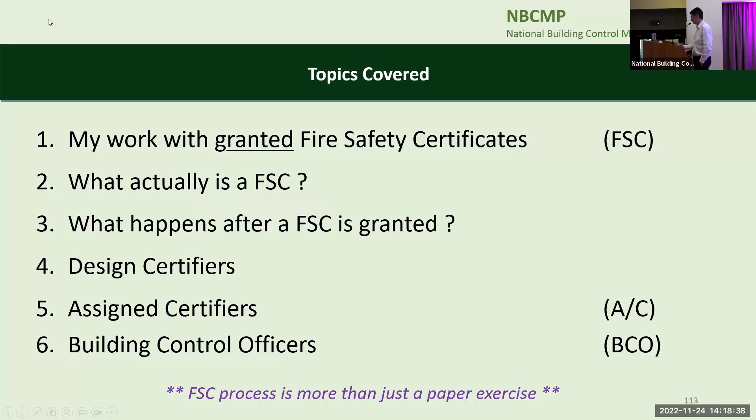9 of them what I would call desktop inspections. I've written out to the consultants based on what came in with maybe the commencement notice or the 7-day notice, and I have another 10 of them where I have gone out and done site inspections.

So one of the main kind of buildings that I wind up inspecting - I've inspected every type, but in the main, apartment blocks, schools, and nursing homes.

The apartment blocks - one of the reasons I went to there is that there's a significant consequence of non-compliance. Not only is there the life safety thing, but say like Priory Hall, where mistakes are made, it winds up costing a fortune to fix, if you can fix them at all.

Schools, I've done quite a lot of them. I know it's been said to me, why are you inspecting schools? Because it's assigned certifiers looking after them. And I'll give you 3 letters: WBS, Western Building Systems. That's part of why I go there. There's a lot of people going into the school, a lot of young kids, a lot of communities using the school afterwards. The government is paying for the school to be built, so we may as well check it.

And the last one I go to is nursing homes. You're dealing with a lot of vulnerable people. And also an important thing is Cork County Council took a decision years ago that we were going to do inspections of all the new nursing homes before they opened, just to make sure they complied. So my boss, Earl Ryan, a couple of years ago said, Martin, go out and inspect them from the start, so that when the dedicated fire officer goes out at completion stage or at opening stage, hopefully then they'll find no problems. That's not the time to find out that they didn't put the fire main in.

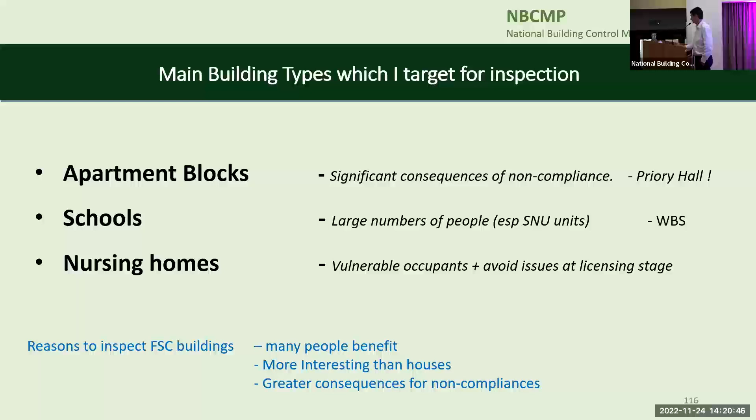Just some examples of the major issues I found this year alone. I had a school extension where they put on, I'm guessing, a 150 meter squared semi-basement that was never mentioned in the fire cert. That one could go to enforcement.

I had an apartment block. There were 2 smoke control shafts, a meter squared each, that were supposed to have gone in. When the fire cert came in, they weren't on it. The fire officer, for various reasons, insisted that they do go on the fire cert, and predictably enough, when they started building, they were missing. So that site has been sitting there for 9 months, nothing happening, delayed until the developers can figure out what they're going to do, because they now don't have room to put in the smoke control shafts.

I have a nursing home. They put in about 100 and something meters squared of timber linings on the ceiling, and a week later they had to take it all back down again, which costs a lot of money. It was clearly written in the fire cert, no timber linings, and they put timber linings in anyway.

I had a 2-story creche. They've put in large inner rooms up on the first floor that weren't on the fire cert. I've caught that one early, hopefully that's not too bad.

I had a storage building. They were required to put insulated cladding at one end of the building, and they put in standard cladding. About 3 weeks after they put it all up, they had to take it all back down again, and I think there was a couple of 100 meters squared of that. They thought they could change it because they weren't in a boundary condition, but they had forgotten that the reason the fire officer put the insulated cladding in is because there was a lot of high-level machines and access hatches up on the top level, and there was an external escape stairs coming down. So the insulated cladding was to cover that. The designer thought he was okay to change it, deviated from the fire cert, and had to undo the whole lot.

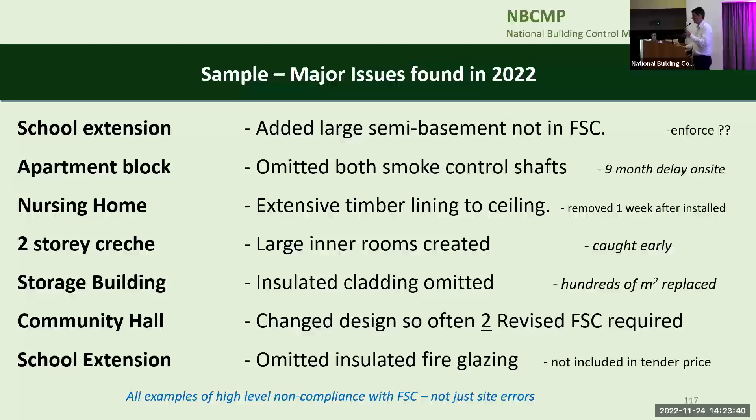So again, these are all high-level examples of non-compliance with the fire cert. They're not just silly site errors or bad workmanship.

If you came to apartment blocks, I kind of broken down the main errors that I found. On one side there, you have the workmanship issues. No matter how good your fire cert is, these are things that can go wrong. Fire stopping isn't great, or somebody's punched a hole through something for a pipe, plasterboard fixings aren't right because there isn't enough screws in it, fire doors have holes around them. I don't want to talk about too many technical details, I want to talk about the high level concept of fire cert. So they're all workmanship issues, and they can go wrong no matter whether you get a fire cert or not.

But what you also wind up getting is layout problems, where the designer has either deviated from the fire cert, or hasn't thought about it, or forgot about it, or thought it was okay to change something, and it caused a problem. So layout things, they put in a new layout, it now doesn't comply. Maybe they have open plan, which wasn't accounted for before, and maybe now they need sprinklers, or they've rejigged the kitchen to make it nicer and to put the hob in a better place, but they've now put the hob too close to the means of escape.

The fire alarms, again, a very common one in apartment blocks. They might put the right detectors in, but then they didn't interlink to the shop downstairs, which they were required to do.

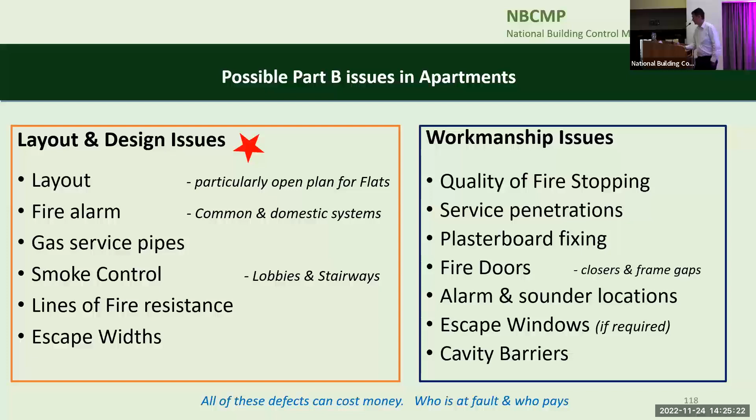Gas service pipes running through main escape corridors, when the fire cert specifically would have said don't do it. Smoke control lobbies being left out, stairways not being ventilated, lines of fire resistance - they put in 30 minutes instead of 60 minutes, or moved it to the wrong place, rooms that didn't work, and escape widths have been wrong. So these are just examples, and I want to focus on the layout and the design changes.

So before we go any further, what actually is a fire cert? The aim of fire certs at day one was to ensure the design complied before you started, so that things would get built right. The effect is that the Building Control Authority certifies that the design complies with Part B. It's not an opinion, it's not an approval, it's not 'it'll probably be grand' - it's a certificate, right?

Just to take an example, I pulled one of the fire certs at random, and the key wordings are in yellow. It's Cork County Council hereby certified the building will comply with the building regulations. The big thing for everybody to note: if the fire officer gets something wrong, it's granted and it's now deemed to comply. If they forget to put sprinklers in, it complies. If there's a poor wording in there, it still complies.

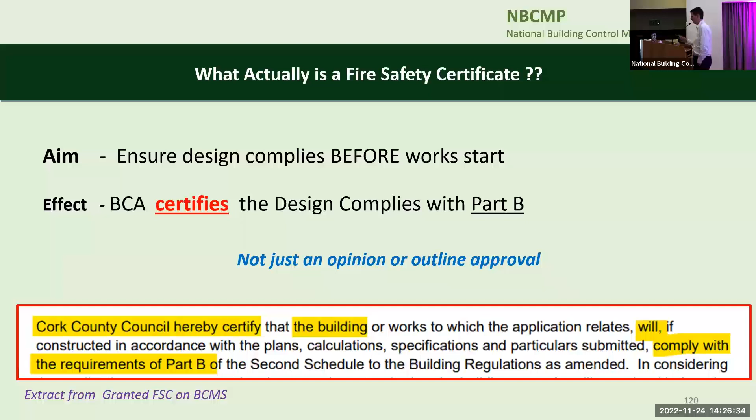And then the flip side for the designers and the assigned certifiers is that's the best comfort blanket assurance you're going to get. You're all hunting for ancillary certs - you're getting a certificate from the council. So be very wary about deviating from it.

Again, a main point I want to make is that the fire cert is not just a paper exercise - it's something to be used. For the designer, it assures you that your design complies. If you change the design afterwards, what assurance do you have? For any assigned certifier here, you're the ones usually left carrying the can and worried most about liability. It's the best ancillary cert you're going to get, because it's a certificate from the council that it does comply.

So what I would say to any assigned certifier is: did you check the fire cert? Did you look to see does it match? Did the design drawings at the start match? Has the designer changed something? Has the builder changed something? If they did change it, does it still comply with the fire cert? And if it doesn't comply with the fire cert, who's now signing off on it?

And for building control officers, it's a tool to aid inspections - I'll talk about that more later. So if the works don't comply, who's liable for the remedial costs?

In the case of that nursing home I went in, they put in the timber linings at expense because it was up really high - the cost of materials, the cost of fitting it - and then 2 days later they take it all down again. And for the school, they had to put in glazing, insulated glazing, which is probably going to cost 10 grand that they hadn't budgeted for. So the builder's probably going to charge them 20 grand for that. Where does that money come from?

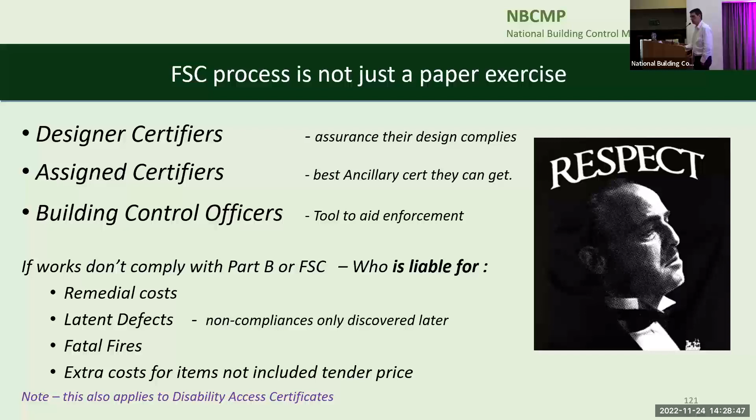So, you know, it will 'generally comply'. You go out on site and you think it doesn't, and the builder will go, well this is one of the ones that generally won't. And you wind up with a pantomime - oh yes it does, oh no it doesn't moment, right? And you then have to go fighting about it.

Whereas if the wording was clear and concise and pinned down on the fire cert, there's no arguing, you don't have to worry about it anymore. It needs to be comprehensive to a certain level of detail. We don't need to know how many screws are going into the fire door, but we do want to know that it is an FD30. If it's not pinned down properly, the builders will run a mile and cause trouble for building control, the designer, and the assigned certifier.

It needs to be correct, because if the fire officer signs off on something that wasn't correct, it's now certified as being compliant. I've been accused over the years in access certs of being too picky, getting people to fix sentences, getting rid of things like 'will generally comply' or 'will comply where practicable,' because then you wind up on site and the builder will say, oh, it's not practical here, and I'll say, well actually it is, and they'll say, oh no it isn't, and you're back to arguing it again. Whereas if you pin it down in the access cert or the fire cert, the argument is over.

And lastly, it needs to correspond to the DAC. There's no point in having a fire cert for one layout and an access cert for a different layout. What's going to happen then?

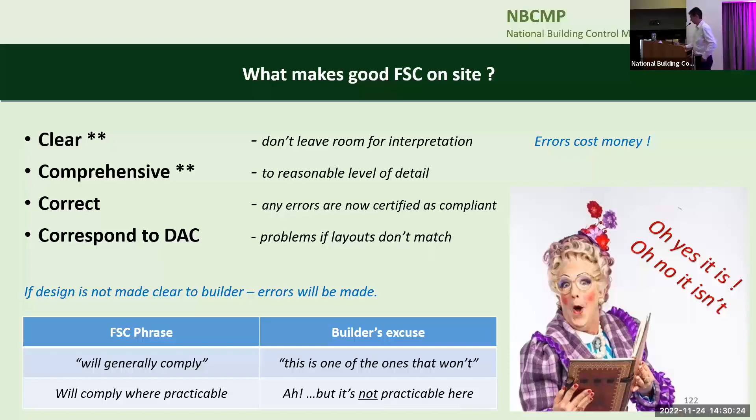So what happens after a fire cert is granted? This is about the best picture I could think of — like Indiana Jones, where there's a lost ark, they just wheel the ark off into the distance and everybody hopes it'll all get forgotten. So what happens with fire certs after they're granted? Do they just get filed away and forgotten? Does anybody ever look at them again? And if anybody does look at it, do they actually understand what's in it, what was changed and why?

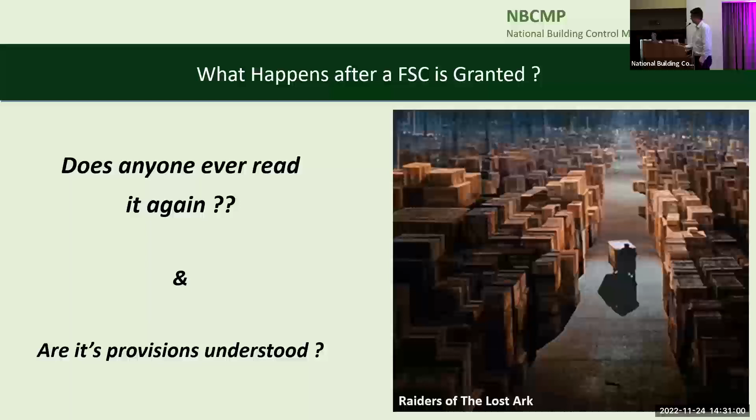So again, I'm a big fan of using fire certs. Common reasons for non-compliance with a fire cert: further revisions after the fire cert was granted. I'd see that example very often on site where there's a problem — you look at the revisions box, there's issued for planning, issued for the fire cert, revised for the fire cert, then issued for tender with changes, amendments after the tender, and then issued for construction. There might be a few more changes.

That's a fair hint that something has happened — it shows a lack of respect for the fire cert. Somebody obviously wasn't too bothered, happy to make a change without going back for a revised one. Another one is reverting to the original design: they get a fire cert, apply for it, the fire officer fights over loads of issues, the fire cert rumbles on for a couple of months, changes are made, and then they go in and build what they intended to build in the first place.

Or another one, maybe less serious, is they missed a revision. Maybe you got a fire consultant in, he applies for the fire cert with the design you told him to apply for, the fire officer points out some things, a few changes are made — maybe that wall is upgraded from an FD30 to an FD60, or that glazing is moved from fire-rated glazing to insulated fire-resisting glazing. The designer gets the fire cert back, puts it in their pocket, files it away like the Raiders of the Lost Ark, never actually reads it, and doesn't notice that the fire-resisting glazing has been upgraded.

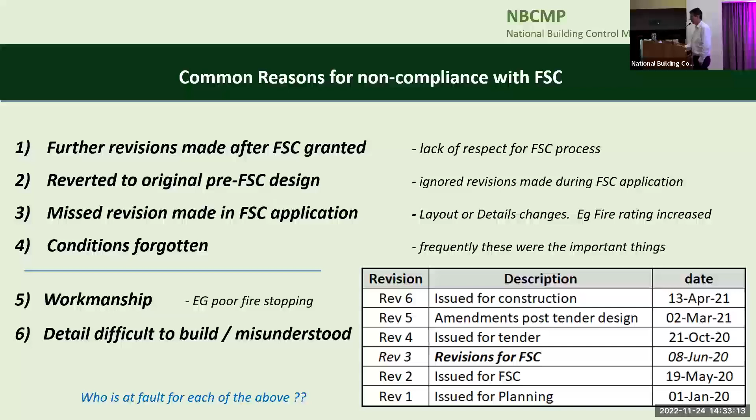So I'm now going to talk about the application of fire certs for design certifiers, and what design certifiers should be thinking about.

So that little table there just shows the processes. At the fire cert stage, when it's granted, it's certified by the fire officer or the local authority. But at commencement stage, the design certifier certifies the design again.

If they've designed it and kept the design in accordance with the fire cert, they now have, as per the little picture there, the best comfort blanket they can get, because that is an assurance that their design does comply and they don't have to worry that they get it wrong. They might have to go back and check their own Part L issues, or their own structure, but they have a guarantee at least in relation to the fire and Part M, if they've gone for an access cert.

So if you deviate from the design, who's now responsible for the change? You've lost your comfort blanket because you now own the changes. And if the design isn't adequately detailed that you gave to the builder and they don't build it right, then who's responsible for those changes?

Another one is, you've changed something, but then the assigned certifier starts thinking about his own liability when it comes to completion at the end. He goes, hang on now, this doesn't comply, and he refuses to sign off on it. So even if the building control people never come in, if you've deviated from your access or your fire cert, the assigned certifier might raise it as an issue.

So again, the designer should think very long and very carefully before they go deviating from the fire cert, and maybe they should pay it a bit more respect.

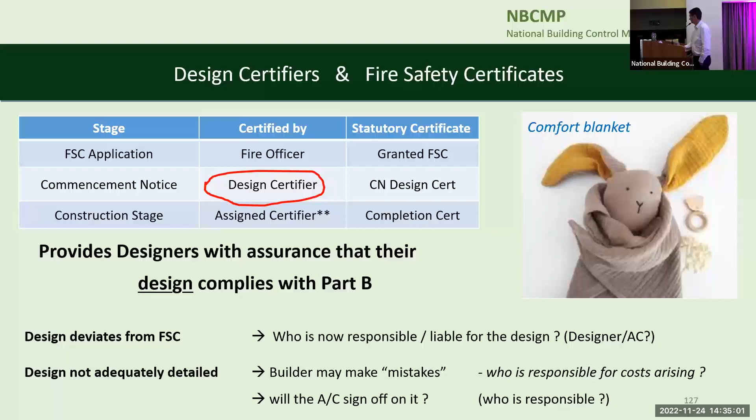So maybe the steps the designer should take when thinking about fire cert: at commencement stage, review the granted fire cert. Is it the same as what was being applied for? Was there any layout changes?

Because that's going to be a big thing. Did some corridors need to move? Did the stairs need to increase? Or were there any design revisions? Did the fire glazing upgrade from one type of glass to another? Did you initially propose a wall was going to be 30 minutes and now it needs to be 60 minutes?

And you need to make sure that all of those changes make it into the drawings that you're submitting with the commencement notice, and ensure that the correct design goes to site.

And consider the implications if you do decide afterwards you have to make any changes. So who's going to certify the changes? And are there any knock-on effects? Again, this would be a very common one where I would see problems.

So just to take a simple example, there might be sprinklers specified, and the builder and the owner go, oh, they're awfully expensive, can we leave the sprinklers out? And you look through the guidance and think, hang on, there's nothing in the guidance here about sprinklers being needed in the building. Well, if you didn't do the fire cert and didn't look through it, maybe the sprinklers were in there in compensation for something else.

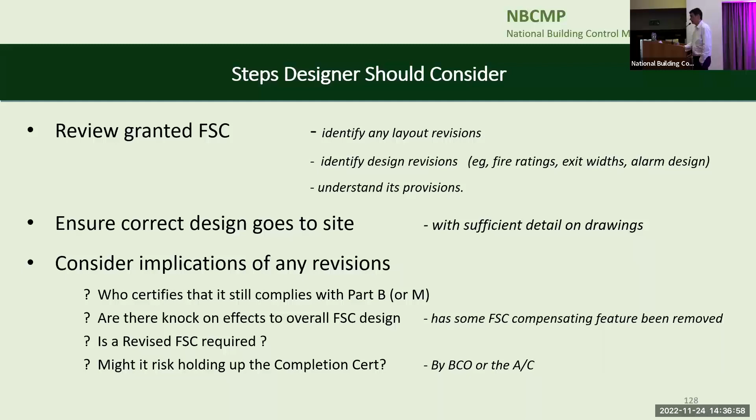And the same would go for a lot of other effects. Is a revised fire cert required, or do you want one to get the comfort blanket for yourself, or are you going to take the risk of A, signing off on it, and B, maybe there might be a hold up with the completion cert. The assigned certifier might hold it up, the insurers might hold it up, or building control, if they go in, they might hold it up.

So the assigned certifier, what do they have to think about, and how do they apply to fire certs? Again, I have the exact same table there.

They're signing it off on completion cert stage. And the lines there, again, is an extract for the cert of compliance and completion. And what I find is a lot of assigned certifiers haven't actually read what they're signing.

Just to read the yellow writing, to paraphrase: based on the above, I now certify the building or works is in compliance - not substantial compliance, not appears to comply, is compliant. So if the building has deviated from the fire cert, to be noted from my table there, the assigned certifier is the only person who has to sign a statutory cert of compliance after the commencement notice comes in.

So if the design changes, who's now signing off on it? The designer signed off on the design at commencement stage, and they're not signing off on it after that. The fire officer signed off on the fire cert, and you've deviated from that, so they're off the hook. So whether they like it or not, the assigned certifier, unless they can get enough ancillary certs, is signing off on it personally. So the question I would ask them is, how good is your liability insurance?

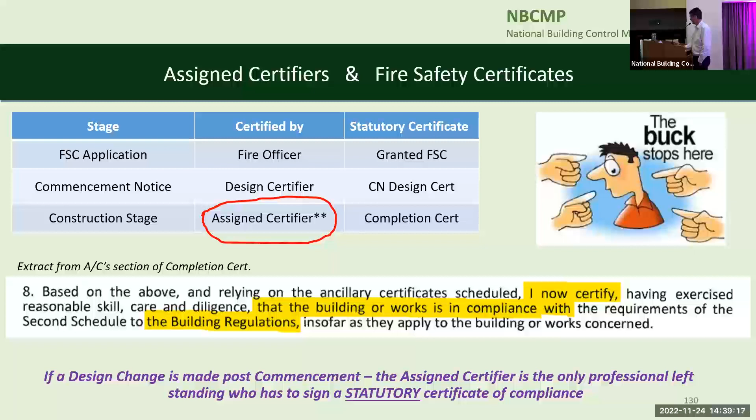So think about your liability. So what should the assigned certifier think about? And I have a lovely, the buck stops here picture.

At commencement stage, first check: does the certified design comply with the fire cert or not? If it doesn't, you should be asking the designer, which version are we building? And who's signing off on the changes? Because if I was the assigned certifier, I wouldn't want to, because otherwise the liability is on me.

So I would ask any assigned certifiers who are watching or listening today, how often at commencement stage do you look at the fire cert? How do you know that the designer submitted the design that complies with the fire cert?

Because I can tell you, very often, when I check the commencement notice that comes in, and if I look at the drawings, very often the fire cert drawings don't match the commencement notice drawings. And invariably, there are big changes.

So at construction stage, if there's deviations, do I still effectively comply with the fire cert? Does it still comply with Part B? Is a new fire cert required? And it's the owner paying for it, not you. And if a new fire cert is obtained, then you now have a comfort blanket that the new design complies. Whereas if you don't get this comfort blanket or revised fire cert, you're signing off on it.

Who certifies any of the redesigned design? And I have it in a different color there, 7-day notices. Invariably, the design that comes in at commencement stage isn't the final design that comes out of the fire cert stage a couple of months later. You're asking for deviations and changes to happen there.

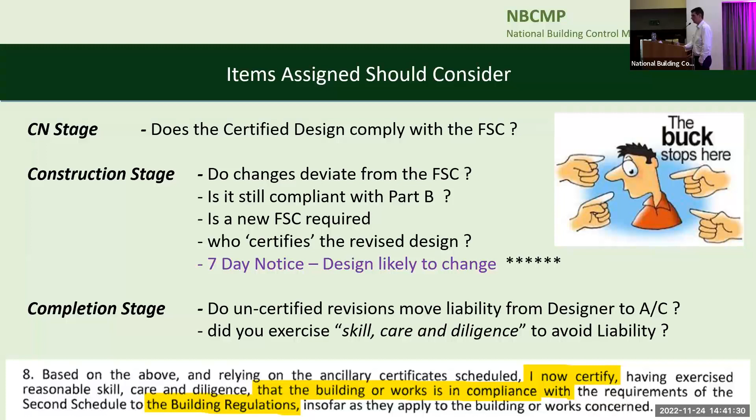So, building control officers and fire certs. Too many building control officers don't use fire certs, and too many fire certs wind up getting filed away like Indiana Jones. So I would like to try and encourage building control officers to inspect buildings and to use fire certs. And I think that's where my expertise comes in - as I said, I have only processed one fire cert, but I've inspected hundreds of buildings with them.

So why should the building control officer use it? First, the design is agreed in advance, and the drawings are better than you will get in a normal commencement notice, and there's more detail so you can figure out what's going on.

I don't have to argue whether a door needs to be 60 or 30 minutes - it's in the fire cert. So I can just say it appears you don't comply with your fire cert, and they can either prove it's right or get a revised fire cert. It makes it very easy because I can just hold up this document. You didn't do that, I don't have to argue with me anymore. Like the guy in the picture there, I'm using the fire cert as a shield.

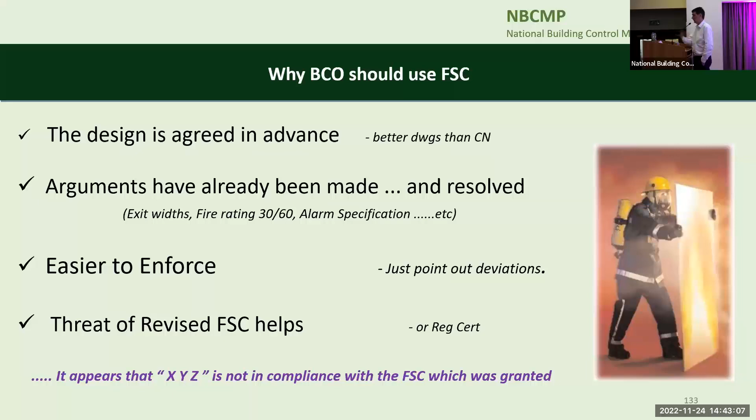And the threat of having to get a revised fire cert, particularly for smaller problems, is a very good threat for the building control officer to encourage people to go fixing things. Because if they want to keep going on, they might then need a reg cert, and it's going to hold them up.

So the approach to using fire certs at different stages - I'm going to talk about the 4 cert stages. There's using the fire cert for building control purposes at the fire cert stage, at commencement notice stage, then during construction, and at completion cert.

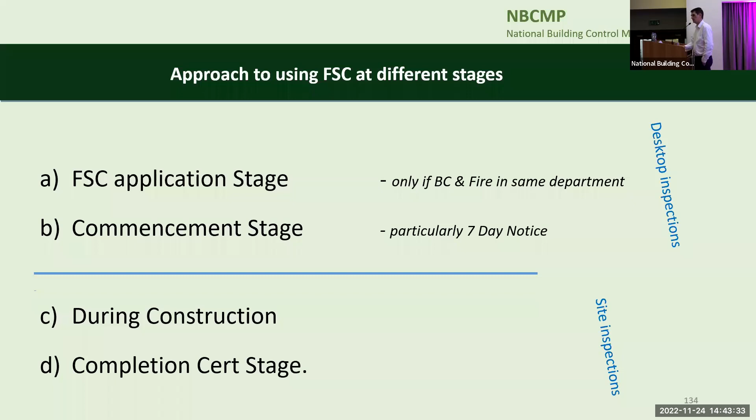So the first two I kind of reserve for what I would call desktop inspections - you're reviewing the drawings - and the other two are what you're doing on site.

So at fire cert application stage, the heading I have here is raising non-fire issues at fire cert stage. I'm going to leave all the fire issues to the fire officer, so the fire officer is limited to looking at part B only, right? But there's nothing to stop me as a building control officer commenting to the parties involved about other stuff.

So the layout in the fire cert frequently doesn't comply with part M. So that stairs, instead of just being a part K stairs, it now needs to be a part M accessible stairs - stairs can't be winders, there needs to be landings in the middle. Therefore the whole stairs is going to have to change, so the whole area around that part of the building is going to have to change. Maybe a lift now needs to go in, whereas it wasn't covered with the fire cert.

So at the fire cert stage, it's worth sorting out those problems, because when it comes to the access cert, it's going to be a problem, and then you're going to be getting back into needing a revised fire cert. So it's better to sort them out early.

So as I said, while the fire officer can only look at the part B stuff, there's nothing to stop me commenting on it. My view is the earlier you sort out issues, the better. If you point out a major blooper, the designer is usually happy to fix stuff on paper, whereas if the stairs is already built and in concrete, you're going to have an argument about everything.

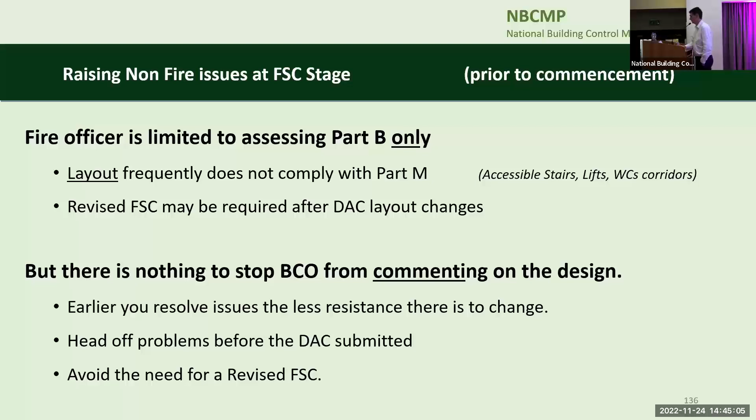Heads off problems before the DAC is submitted. So you're not going to wind up with two different layouts, and you might avoid the need to get a revised fire cert. So building control input during the fire cert.

Contentious fire certs - what I find on these is if there is a major barney in the fire cert and there's major arguments about everything, they are the ones I find don't build in accordance with the fire cert. They go in, they build what they wanted to in the first place.

So if there's a really contentious fire cert, the fire officer will tell me, and they get moved right up the risk analysis for inspection.

Contentious elements - if there's an argument about whether the glazing needs to be fire resisting or fire resisting insulated, again, these are the things that they often won't bother doing on site, or they'll forget to do on site. So again, that will move up my list of things to keep an eye on.

If there's significant revisions needed and changes to the layout of the design, again, my view is that normally when that comes to site, all those revisions are forgotten about.

And then non-compliance with Part M issues, you're going to have major layout changes. You may as well sort them out now.

And contentious fire certs for me get prioritized for inspections, and particularly for access certs, which I would do more of. If there is something contentious in the fire cert or the access cert, maybe it's worth putting a condition on just to pin that down.

What I would use this a lot on is in schools. I have found that they always put entry control systems at the front door, and they always don't comply. So I always put a condition on, big schools.

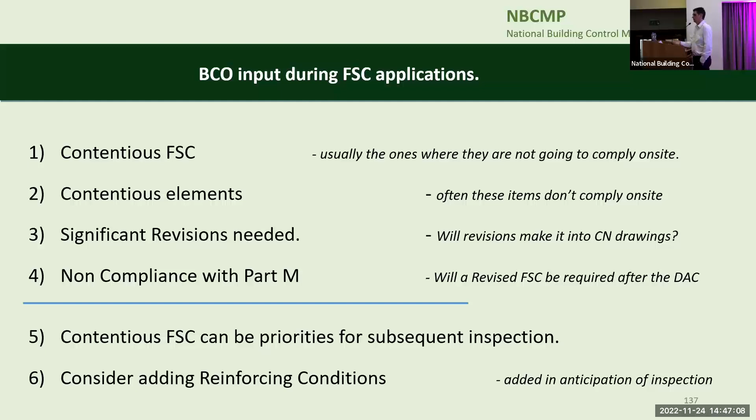So raising non-fire issues at the fire cert stage, as you would have said, warn you we did, listen, you didn't. So for all of these things where, if I have conditioned something or told them at a far earlier stage that something was going to be a problem, if they then didn't do it, I am more than happy to go, well, I told you.

And it puts the designer, the design certifier, and the builder on the back foot. All their arguments, but it'll cost us loads of money to fix it. Well, I told you, why didn't you do it? And at that point, they can go fighting amongst the three of them, like who's responsible for it. They're not arguing with me anymore.

So as for raising issues, if you spot an issue at the fire cert stage with your building control hat on, you can raise it with the fire consultant. Now, the fire consultant might not be the designer as well. They might just be dragged in for the job, so they might not be allowed to change it. But maybe they can coordinate with the DAC so that the two layouts match and the stairs can get changed. But if they can't, then maybe they need to tell the client.

So if the fire consultant can't or won't fix something, a non-Part B issue, they remind the fire officer that you can only look at Part B, then I write to the owner. And tell them, look, you're getting your fire cert, but there's a problem. You're going to have to change it. You're going to need a revised fire cert. So do you want to continue with this application or do you want to get a revised one? And if they do need to get a revised one afterwards, again, I did tell you.

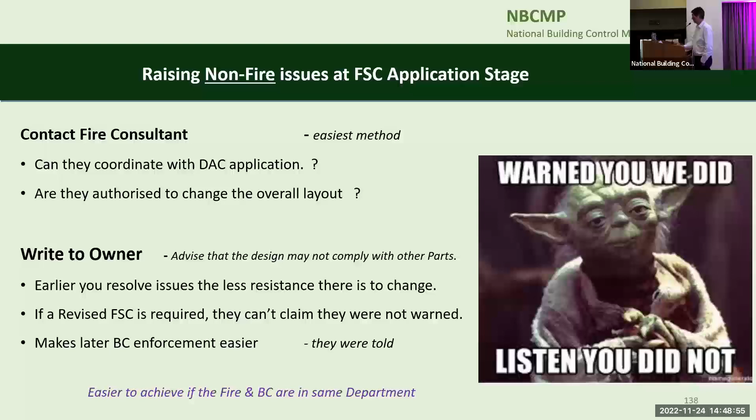So here's just an example of a sample letter I would send out. If a fire cert is in and there's a problem with it, the fire officer might point it out to me, or maybe I have the access cert and tell them. Again, this is just a paragraph out of a letter - the main body of the letter would have 'we request the information under section 11(3)' and all the other legalese. So this is just a paragraph.

Just as an example, it appears that the development requires an access cert under Part 3B of the regs, and it appears one hasn't been submitted. Further to review of the documents submitted with the fire cert, it appears that elements of design may not comply with Part M. In particular, I'm just highlighting the issues - like the size of the lobby isn't right, the open risers to the stairs are a trip hazard, and you've left out the passenger lift.

Please provide details of how you're going to comply with Part 3B disability access certs, and when are you going to submit the access cert? Let me know. And then I give them the reminder - it's always good to allude to the word money because that gets people's attention. In order to reduce the risk of costly remedial measures, it's strongly advised that you get your access cert in and sort it out now. And all work done in the absence of an access cert is done at your own risk. That usually encourages people to get things in very fast.

I sent one of these once from home. I was working from home that morning, and then I cycled into the office. By the time I got to the office, I had a response - 35 minutes later.

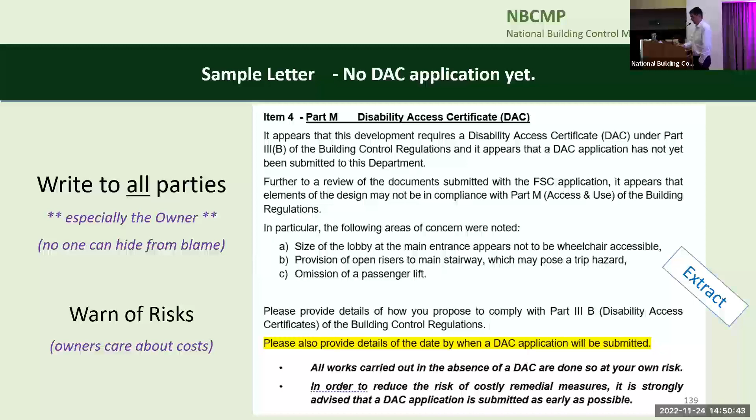The key thing is to write to the owner, because they're the one who's paying for everything. No, I write to everybody, and then they can fight it out between themselves. I don't know whose fault it is - it might be the designer's fault, it might be the owner's fault.

But if you write to everybody, they can sort it out themselves. So using fire certs at commencement stage, particularly on 7-day notices, because they're always a disaster - my view is it's better to sort out problems early. If you tell them before it's built, it's much easier to get them fixed. And a good risk analysis helps with that.

So here's just an extract of the risk analysis we run. Twice a month, I would export all the data out of BCMS for the commencement notices, run them into Excel, and it comes out something like this. I can then filter it for commercial buildings or office buildings or whatever I want, and I can see exactly what's come in, and then pick what I'm going to inspect.

If I had reviewed it at commencement notice, or during fire cert stage, I would then know - hang on, this one's going to be a problem because there was a major fight about the stairways - and they get moved right up the list of inspections. Or I might just open the drawings to check, did they put that new stairway in like they promised?

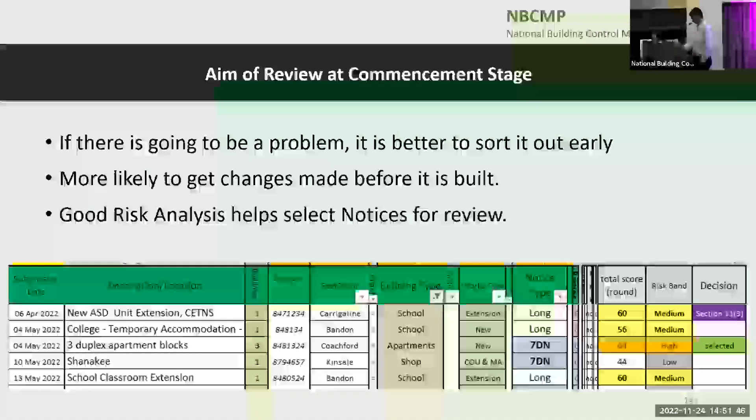This is a sample letter we might have sent, just a paragraph. The cover letter would cover all the requests for info and that sort of thing. But as an example: it appears that the drawings submitted with the commencement notice do not correspond with the design for which the fire cert was granted, and may not be in compliance with Part B. In particular, the following areas of concern were noted: omission of the proposed smoke control lobbies to the stairways, wholesale changes to the first floor staff layout area, subdivision of the classroom creating inner rooms which are not described in the fire cert. Please tell me how you're going to comply with Part B, or with your fire cert.

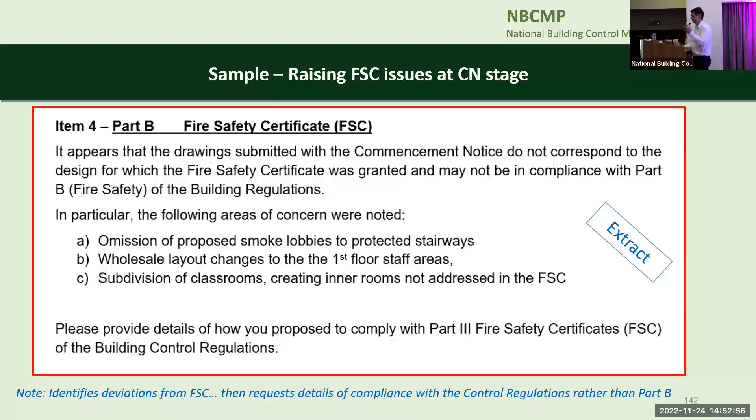I'm just kind of throwing the problem at them there. I'm telling them there's a major problem - they haven't done it wrong yet, so they now have an opportunity to fix it. And if they don't fix it, I can go back later and say, well, look, I told you that you needed to have the lobbies. You knew, because you proposed it in your original cert. It's not my fault that you've now left them out, and it's not my fault that your job has been delayed for 9 months. And the owner can then start fighting with the designer and the builder over that - why didn't they go in?

So 7-day notices again are a particular problem, partly because the design that comes in at 7-day notice stage very often does not comply with Part B, not to mind Part M. So the question to be asked is, how much is built before the fire cert is eventually granted? It might be 4 months before the fire cert is granted, and at that stage the stairs that the fire officer has been fighting about are already built. Then the problem is, are you going to get the builder to change them back, or are they going to work with the original design?

And again, just a reminder for the assigned certifier - he's got to sign off on it at the end. The design has changed - is the assigned certifier taking enough notice of the 7-day notice process? And for Part M, if they didn't comply with Part B in the 7-day notice, then they definitely didn't comply with Part M, because the access cert hasn't gone in yet.

Layout changes are often required. The toilets might have been forgotten, corridors are going to need to move, turning spaces are going to go in, extra toilets which are going to move things around, the stairs might need to get bigger, a lift might need to go in - and they're all going to have massive knock-on layout effects for the fire cert, and you're then getting back into a revised fire cert. So again, is the assigned certifier aware of the changes that are going on? Because they've got to sign off on it.

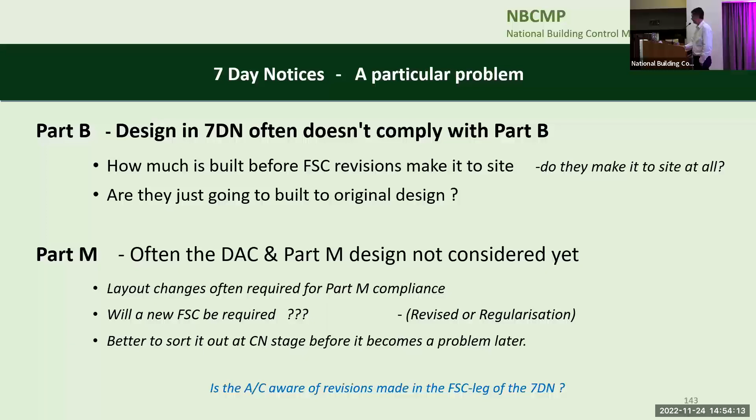So which design are you building? Are you building the design ones? Are you building the commencement notice drawings, or are you going to build the current fire cert ones? This letter goes to the owner, the designer, the builder, and the assigned certifier.

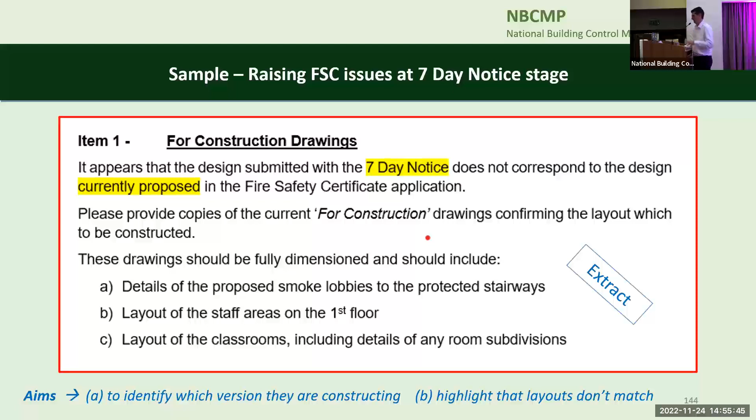So I'm flagging all of the problems for them early. And what I would hope at that stage is that the assigned certifier and the designer are going, oh, this is a problem, let's fix it now, rather than later.

And I would also put in a gentle, maybe not so gentle, reminder: under Article F4, a certificate of compliance and completion will not be validated until such time as all requests for information and statutory processes, including the fire cert and DAC cert, have been satisfactorily concluded.

So that's putting them on warning. I've told you there's a problem. If you don't sort it out, you're not getting your completion cert off of us until you sort it. So please sort it out now. And again, I'm reminding them, until you get your cert of compliance and completion, which we're not going to give you, you can't open the building.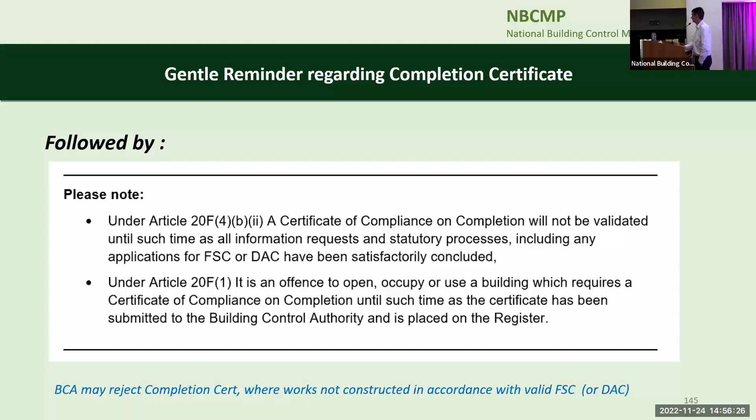So use of the fire cert then during construction. Maybe you didn't review it at an earlier stage, or maybe you did. So any building control officer who's thinking about doing an inspection of a commercial building, a couple of steps I would always take: first, review the granted fire cert. It's there for you, you may as well use it. It's going to make your life an awful lot easier.

So do the fire cert drawings match the commencement notice drawings? Try to identify any deviations between the two. Identify likely problems, which you'll pick up from experience. And if you do identify problems, consult the fire officer.

Now, it's very easy for me because I'm in the fire department, and the guy who did the fire cert is probably 4 or 5 desks away from me. But if you're split, maybe you're in planning and they're in the fire officer's department, maybe you need to build these relationships so you can talk to them, because they've done the fire cert. There's complicated stuff in there. I don't want to have to go re-reviewing it. So if the fire officers put stuff in, talk to them, ask them why they put sprinklers in.

So some of the questions I would ask: what were the main arguments in the fire cert? Because that gives me a heads up on what the builder isn't going to do. Ask for the main points to watch, maybe the contentious issues in the fire cert. The fire officer knows what they are. So maybe they'll tell you there was a huge issue over smoke control. It's really important, make sure you check that for me, please.

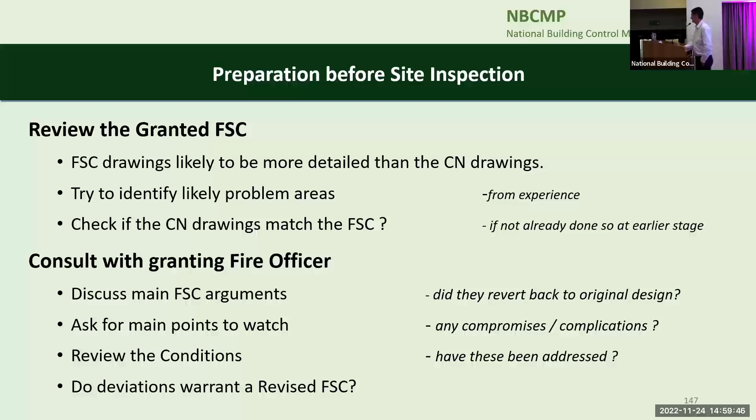So where non-compliances arise on site, the advantage of using the fire cert is I don't have to re-argue Part B anymore. I don't have to open up technical guidance, I don't have to understand the British standard. I do building control, I cover all the building regulations A to M, I'm pretty good at them, I'd say I'm very good at Part M. I couldn't possibly be as good as, say, Sarah there at fire stuff, because I'm not doing fire cert. So it's not for me to reopen that can of worms. The advantage is I don't have to, because it's already been argued out, it's already been decided, and it's already been agreed.

So discuss it with the fire cert. And if you are raising a point, argue compliance with the fire cert. Don't argue compliance with Part B, or with the British standard, because that argument is being made and it's been resolved.

And then if I do raise an issue at that stage - getting back to Yoda - if I told you at commencement notice stage that there's a problem, and nine months later I'm out on site, that's still a problem, we told you. That puts the designer on the back foot - you were told it was wrong, why didn't you fix it? Not my fault anymore, and it's much less easy for them to sob story you into it.

I had one last week - I was in a school. There was a ceiling that should have been fire resisting, and it didn't go in fire resisting because they missed that change in the fire cert. The designer and the builder were trying to give me the sob story that this wasn't priced for in the tender, it's going to cost the school loads of money. And I can feel their sympathy, the school's got a tight budget. But look, I told you - if you'd acted on it when I told you, you would have put it into the tender, it wouldn't have come up as a problem now, and it would have been priced right. You wouldn't be arguing with me about money anymore.

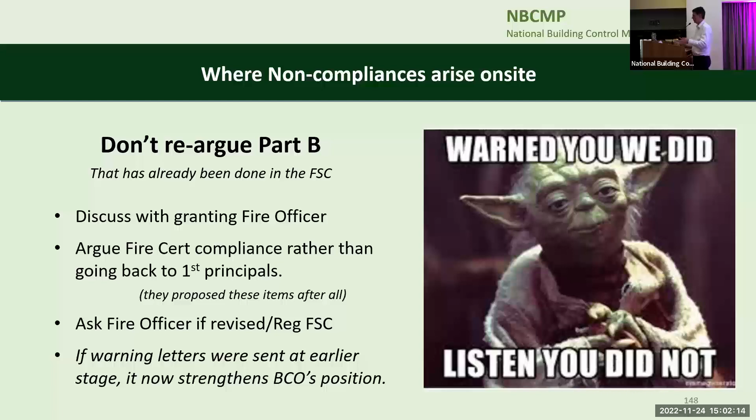So the big thing I'd say to building control officers is: do inspections with fire certs, take it with you, know what's in it, and use that as your shield to do your enforcement. It makes it far, far easier. If you go and do an inspection in a house, you've got to argue about the heights of windows and whatever paragraph says. Whereas if the building has been fire certed, if it says the wall should be 60 minutes, then why isn't it 60 minutes?

I've kind of gone back to this slide again, I had it earlier - the building control officer requirements for an enforceable fire cert. It needs to be clear, don't leave room for interpretation, because if it's not very clear in the fire cert or in the access cert, you then can't argue that they didn't comply with it. So then you maybe have to go back to arguing what the technical guidance or the British standard says. It's not that it's not enforceable anymore, it's just much harder for you. Whereas if the fire cert was clear, if it didn't have the word 'generally' or 'should' in there that they can start arguing about, it just makes it much easier.

And for the assigned certifiers and designers listening, it also applies to them, because if the design isn't very clear and the builder goes off on a tangent and does something else, and the designer says 'hang on, that's not right,' the builder will argue, well, it wasn't clear, I went and did my thing. If you want me to change it, I'm going to charge you for it.

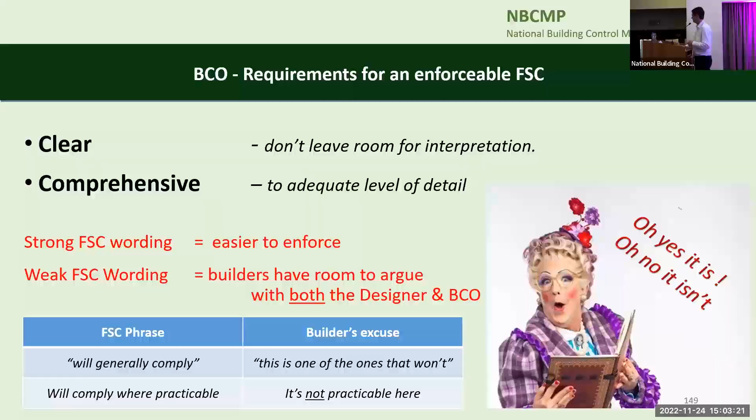So again, just some sample letters that we would send. These are just extracts from the main body of it. So just on the fire cert.

It appeared on site that the layout and construction of the stairwells at podium level were not being constructed as in the fire cert. Again, I'm not arguing about what should and shouldn't be there. I'm saying you didn't do what it said in the fire cert.

In particular, it appeared that the stairway rising from the basement car park was not separated from the stairwell serving the upper floors by 1 hour fire resisting construction as proposed in the fire cert. I put the word 'proposed' in cunningly, because you proposed a 1 hour fire rated construction. How come you've forgotten to put in the 1 hour fire rated construction?

And just as another example, it appeared on site that the doors between the atrium and the stairway were not 1 hour fire doors as proposed in the fire cert. So I don't have to argue whether the door should be an hour or not. It said an hour in the fire cert. That argument's been made. Why didn't you put an hour in?

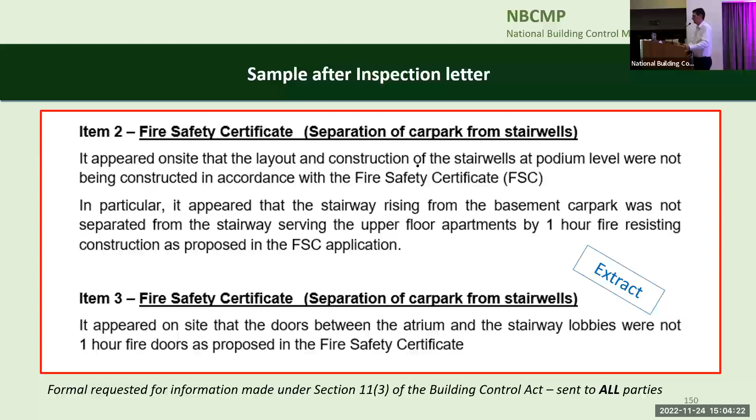Again, it just makes enforcement an awful lot easier. Even if I'm not the world's greatest expert on what's in Part B or BS 9999, I can just hold up the fire cert as my shield.

So at completion cert stage, hopefully you've picked out all the problems already. All I'm going to say here is, I've given them the reminder all along that look, I've raised these issues. If you haven't sorted them out, if you haven't got a revised fire cert if you needed it, I'm not going to give you your completion cert until it's sorted out. And in which case you then can't occupy it.

And again, this is the importance of sending all the letters to the owner, the builder, and the designer. If you just sent the letter to the builder or just to the designer, maybe the whole problem was the designer's fault and they didn't want to admit it, and it all comes to enforcement and the building can't open, and then the owner's hearing about the problem for the first time.

It's, number one, unfair on them. Number two, it goes to court and the judge will give out to you for not telling them. And the owner is the only person you can serve the enforcement notice on. So if you didn't tell them from the start, you're going to have trouble enforcing against them.

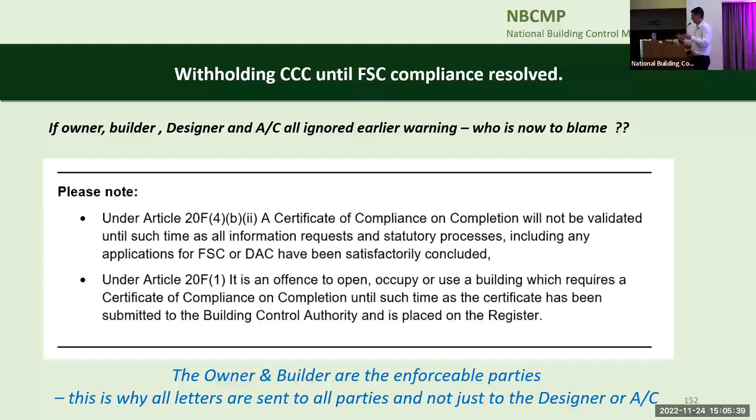But also, if you tell them at the start, look, here's a problem that's going to cost you loads of money, they're likely to tell the builder to fix it. So by writing to everybody, whoever's at blame, the other people are going to force them to fix it.

So just in conclusion: regarding fire certs, they are not a paper exercise and shouldn't be hidden away like Indiana Jones. They should be respected, and they should be used. Compliance is in everybody's interest.

The designer and the assigned certifier should respect fire certs a bit more. They should pay attention to them. They shouldn't be so quick to deviate from them, because they're losing their comfort blanket of assurance that it complies, particularly the assigned certifier, because as I said, they are assigning a statutory cert of compliance. And if the design has changed since commencement stage, then they're the ones carrying the can. Will the ancillary certs that they get be good enough?

And that's the last point, the fire cert can assist enforcement. I suppose one thing I should have added is that inspecting commercial buildings is far more interesting than doing one-off houses or even housing estates. So if you haven't done them, I would encourage you to inspect them and use the fire cert.

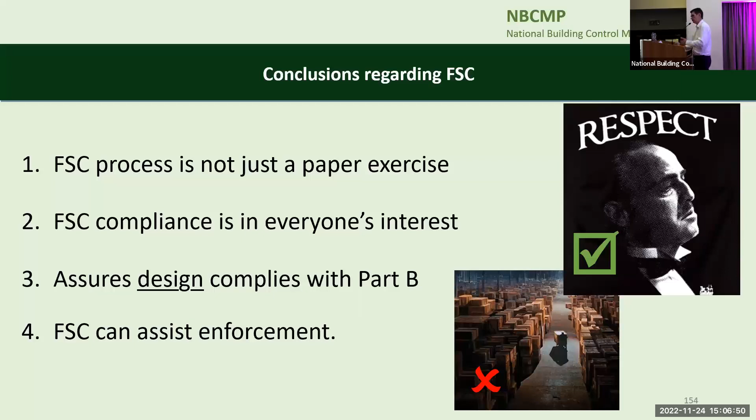And if you're afraid of doing a big commercial building because you're daunted that this is going to be too hard and maybe you don't know enough about it, you can use the fire cert and the access cert to make your inspections very simple. And that's it. That's all I had to say.